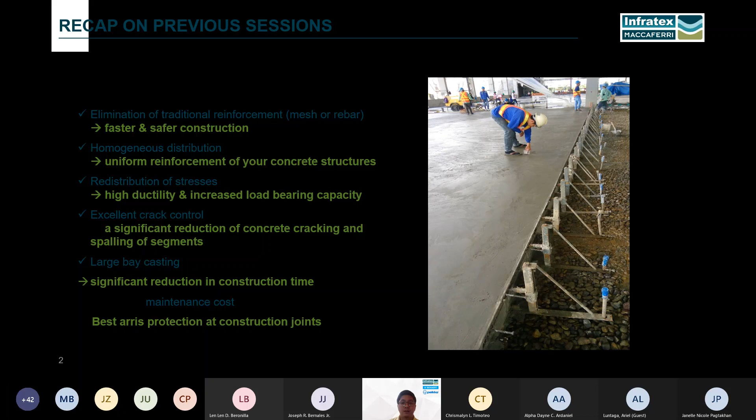For this session, we'll be discussing the construction methodology of jointless steel fiber reinforced concrete floor. This presentation includes the preparation of the soil, Terajoint and Teradowel installation, the dosing of steel fibers in the concrete mix, pouring of steel fiber reinforced concrete, other concreting processes, and at the end we'll have a question and answer session.

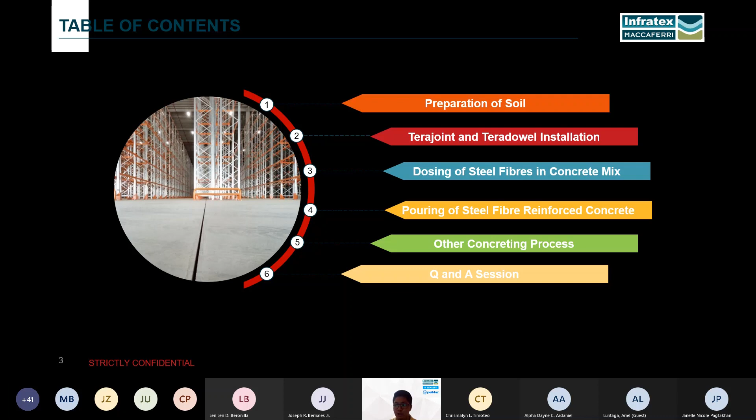To begin, just like any other type of construction methodology, it starts with the preparation of the soil. The sub-base must be prepared in accordance with the project specification. The soil must be well compacted.

Remember that if you do a backfill sub-base done in layers, each layer must be compacted as required on the spec. For example, we have here a 3-layer sub-base, so layer 1, layer 2, and layer 3 must be compacted as required. If the spec requires 95% compaction, each layer must be 95% compacted, not just the top or bottom layer, but all of the layers.

Next, make sure the soil is as flat as possible, with a flatness tolerance of plus or minus 10 millimeters. As mentioned in the first session, most constructors in the Philippines follow a stricter flatness tolerance of plus or minus 5 millimeters, which is actually better. But for consistency in this presentation, I'll use plus or minus 10 millimeters, since that's the range in which the Terajoint can perform.

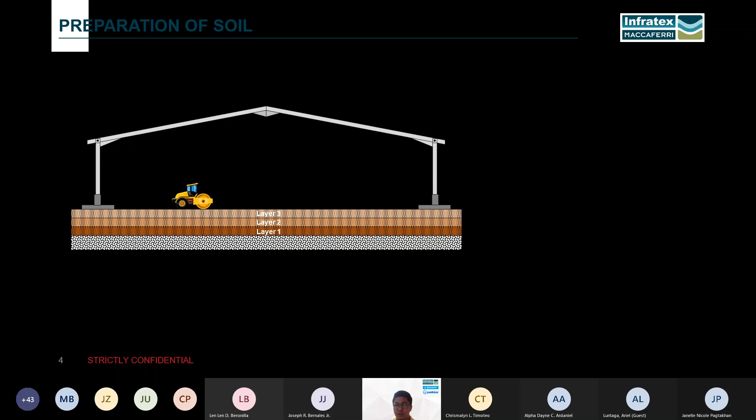The last point is to make sure the sub-base is dry with no water ponds. We don't want too much moisture penetrating the slab, causing oxidation or corrosion, and spalling of segments in the floor.

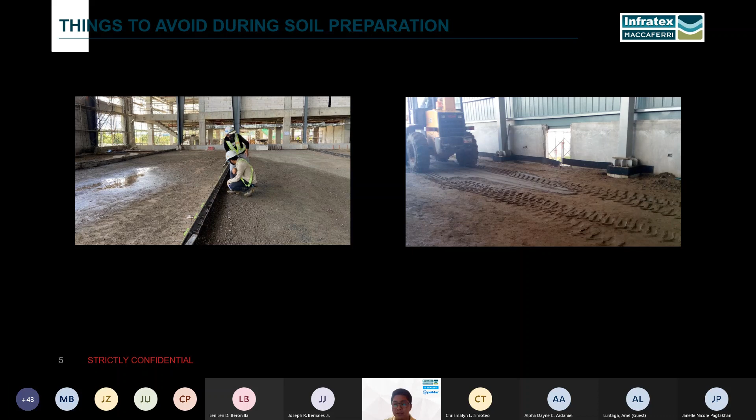Here's a sample of things to avoid during soil preparation. Number 1, water ponds or wet sub-base. Number 2, rutting or soil depression from heavy equipment present at site. Soil depression usually indicates soft spots or weak spots in the soil, and these soft spots are the usual failure points in your concrete floor, eventually causing deep cracking. As soon as you notice soft spots or depression in the soil, make sure to recompact it as required by the specs.

On the other hand, here's a sample of a perfectly prepared sub-base. The soil is dry, with no water ponds. Even though mixing trucks entered this area, it does not create soil depression, indicating the soil is well compacted. Open areas are also temporarily closed to protect the soil and freshly concreted slab against rain. It's also good practice to use a plastic film sheet as an extra layer of moisture protection, which also lessens friction between the soil and the slab as it starts shrinking.

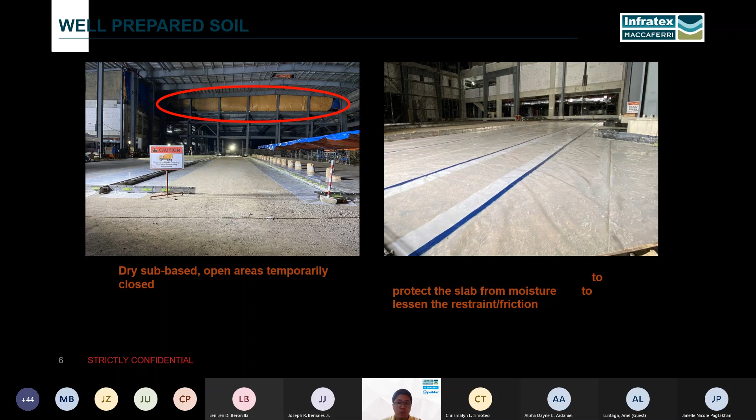After preparing the soil, the next step is Terajoint and Teradowel installation. Here I have two joint layouts. The left one uses a combination of Terajoints and Teradowels as a cheaper option. The green lines represent Terajoints, and the blue lines represent Teradowels.

Mostly, Teradowels are placed on joints underneath racking systems or joints where most traffic comes from foot traffic only, not forklifts. The right layout uses a full Terajoint system, which is more flexible in cases where the location of the racks isn't yet identified. These layouts are submitted to the clients for approval, and once approved, the position of each Terajoint and Teradowel line must be followed as closely as possible.

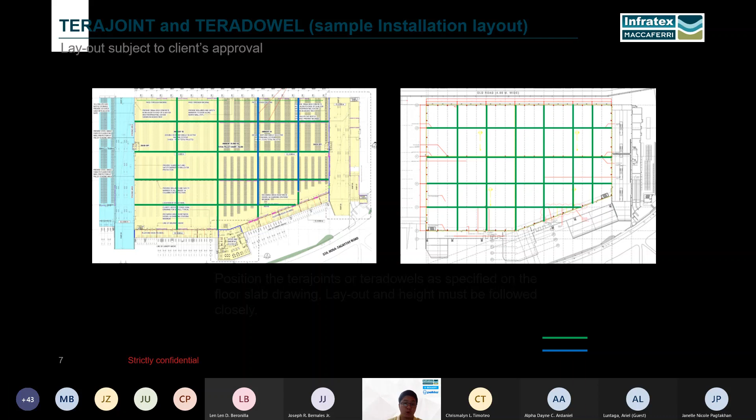As mentioned in the previous session, Terajoints are normally 15 millimeters smaller compared to the slab thickness. So if the slab thickness is 200 millimeters, the Terajoint height would be 185 millimeters. The reason is that we should maintain a 15 millimeter gap, plus or minus 10 millimeters, between the soil and the Terajoint. This gap allows the slab to move smoothly during its natural concrete shrinkage. The 10 millimeters is where the flatness tolerance comes from.

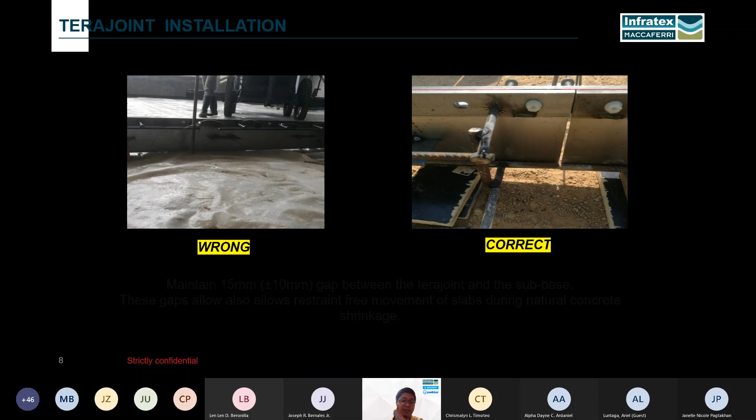If you install the Terajoint like this, where the soil touches the bottom of the Terajoint, it hinders or blocks the movement of the slab during shrinkage. This normally causes the arris to separate from the top strip. When they separate, the arris is prone to damage, and we don't want that to happen.

Since there is a gap between the Terajoint and the soil, there's a risk of overflowing concrete. So it is a must to remove that overflowed concrete while it is still wet, or otherwise we have to chisel off hardened concrete, which is time consuming. In our previous projects, to minimize that, we recommend using materials like pipes, timber from the pallets of the Terajoints, or even sand to block that gap. After the concrete hardens, you can just easily remove that material.

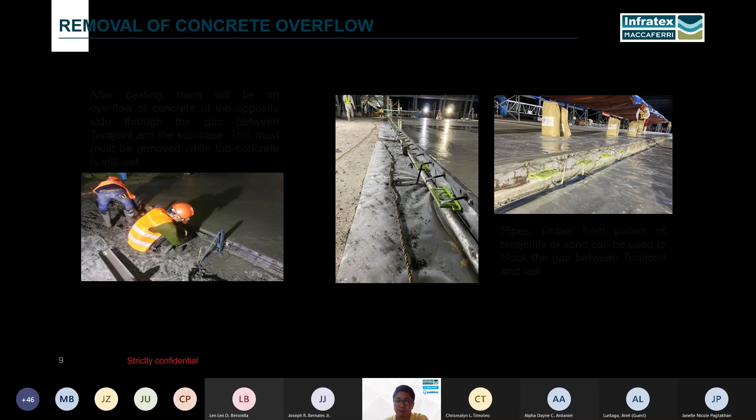In installation of the Terajoint, there's a device called Terafix to allow easy and quicker installation. It has several features. At the top, it has a bolt that adjusts the height of the Terajoint. At the middle, it has support tips and a pin that holds the Terajoint. At the bottom, it has a tapered foot to provide stability and allow easy removal from hardened concrete. At the other end, it has a hole that allows insertion of rebar or a rebar pin, and a bolt that locks the Terafix and Terajoint in place.

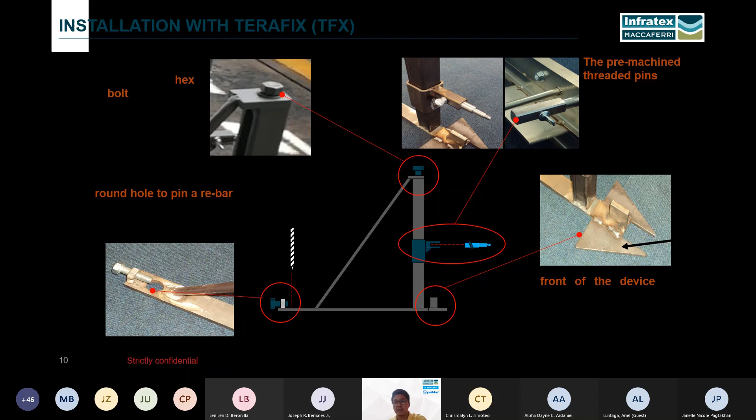Normally, we recommend using 3 pieces of Terafix per Terajoint, one at each end and one at the middle. However, if you're doing a very large bay, say 30 by 30, it will require a lot of Terafix — approximately 120 pieces for that bay size. That could be a lot and expensive.

So to minimize the number of Terafix, we adopt another method of using rebar pins. Instead of 3, we use 2 pieces of Terafix, one at each end, to adjust the Terajoint to the right height and straightness, then support it in between with rebar pins. When using pins, make sure not to weld or fix them directly on the top strip, the dowels, the sleeve, or the divider plate. We can only allow fixing or welding of pins on the studs, and it should be in between the dowels, not facing them, because it may block the movement of the slab.

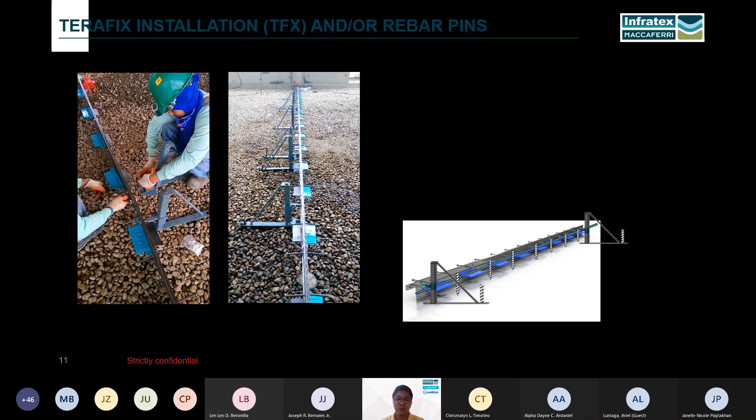In Teradowel installation, first prepare the timber or formwork according to the slab height. For example, for a 200 millimeter slab, use 40 millimeter timber or a bit smaller, but not less than 20 millimeters. The formwork should not be bent, so that you can install the sleeve flat on it. Then make a horizontal line at a height equal to half of the slab thickness — in this case, 100 millimeters. Also mark the center to center spacing between the sleeves, ideally 500 millimeters apart.

Before you install the sleeve, make sure to inspect each one. Any damaged sleeve should not be used. The tape on the other side, or the slot of the dowel, should be properly sealed off. Any damaged tape should be replaced.

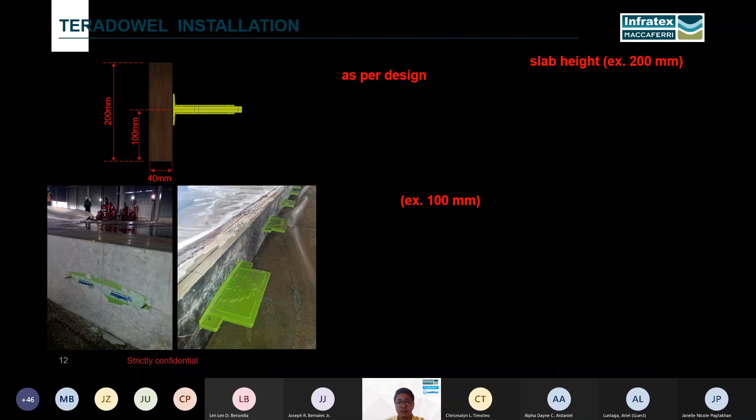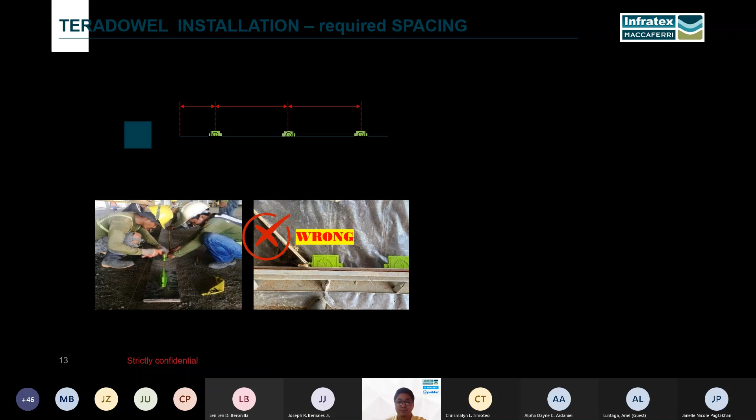Also take note that the first sleeve should be 250 millimeters from your starting point, such as from the walls or the isolation joint of the columns. Please avoid installing the sleeve where it touches the isolation joints or the walls. Same case on the end of the Teradowel line: if the sleeve ends up very near the end, say 100 millimeters or less, you can adjust the center to center distance between the last two sleeves to make the distance between the last sleeve and the end of the line between 200 and 250 millimeters.

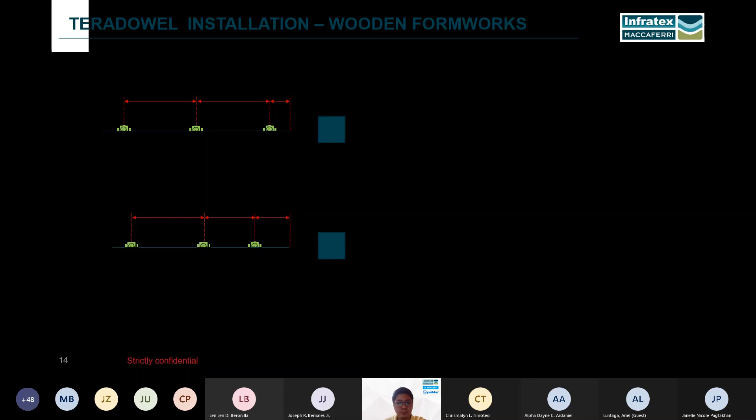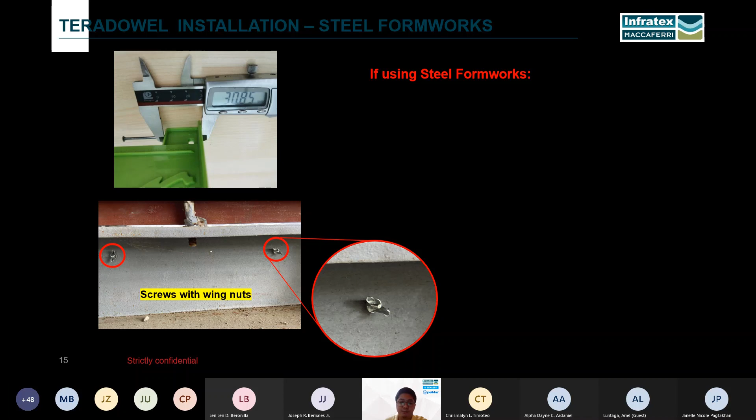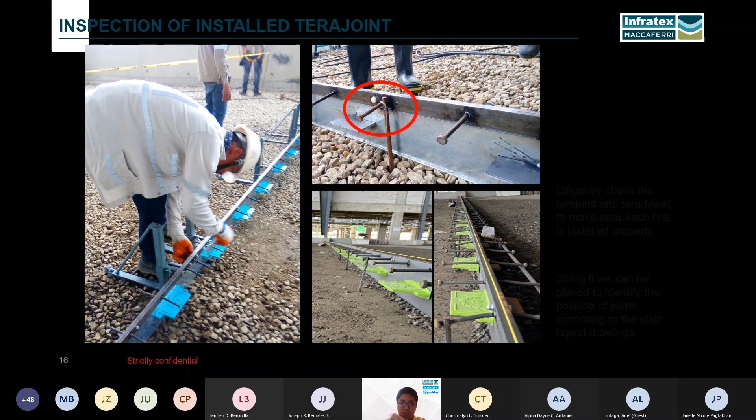After installing all the Terajoints and Teradowels, you have to double check or inspect each one, making sure you have the correct height and straightness. Any mis-installed pins must be adjusted — for example, where the pins touch the top strip, you have to adjust it at that portion.

After that, the next step would be the dosing of steel fibers. You can do the dosing either at the batching plant or at site at the mixing truck. But it's highly recommended to do the dosing at the batching plant through the conveyors and central mixers, because it will take less time to achieve the right amount of steel fibers per cubic meter of concrete.

However, if the batching plant is too far from the site, say the mixing truck will take more than 1 hour of travel time, it's best to do the dosing at site at the back of the mixing truck. In that case, the drum speed must be at the highest speed. After completely dosing the steel fibers, continue mixing for at least 5 minutes, or 1 minute per cubic meter of concrete. So if you have 10 cubic meters of concrete, continue mixing for 10 minutes.

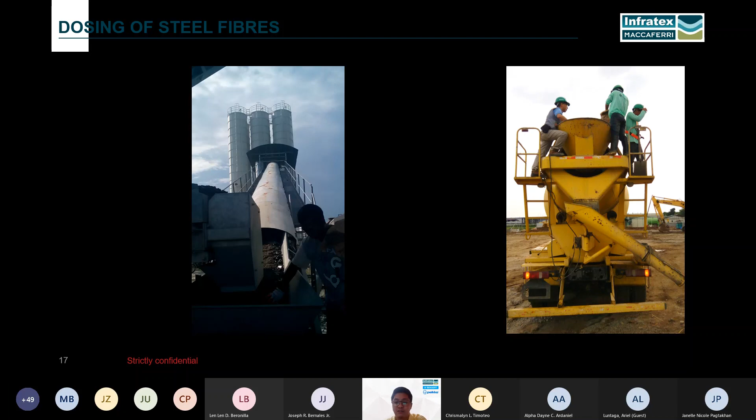After the dosing, you have to check the slump, which depends on the fiber dosage and how you're going to pour the concrete. For steel fiber reinforced concrete with 20 to 25 kilogram per cubic meter, if doing direct discharge, the slump must be 130 millimeters; if using a concrete pump, it should be 150 millimeters. For SFRC with fiber dosage of 30 to 35, by direct pouring you must have a slump of 130 to 150 millimeters, while using a concrete pump it should be 150 to 180. For fiber dosage of 40 to 45 kilogram per cubic meter, both for direct discharge and using concrete pump, the slump must be between 150 to 180 millimeters.

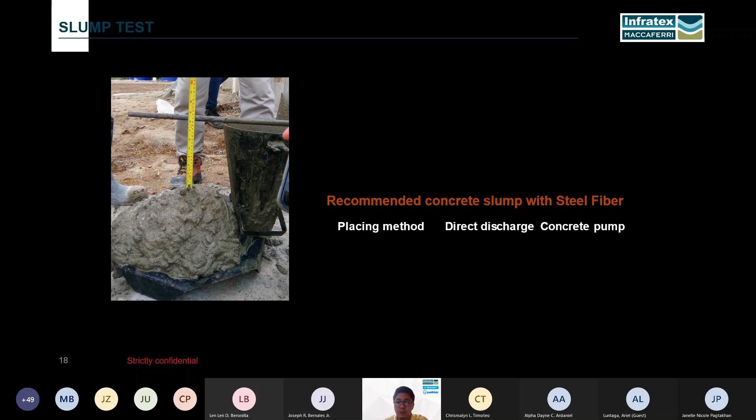After checking the slump, we'll do a washout test to determine whether we have the right amount of fiber per cubic meter. This is based on British standard EN 14721. We take 3 samples into a 5-liter bucket, then separate the fibers from the concrete mix by vibration, washing out the mixture, then picking out the steel fibers and washing it again. The collected fibers are weighed, and the allowable result must be within plus or minus 10% to allow it for pouring.

For this specific washout test, the fiber dosage is 20 kilogram per cubic meter, so for a 5-liter bucket, the theoretical amount of fiber is 100 grams. After doing the washout test, we recorded a result of 98 grams, telling that the fibers are well mixed within the concrete.

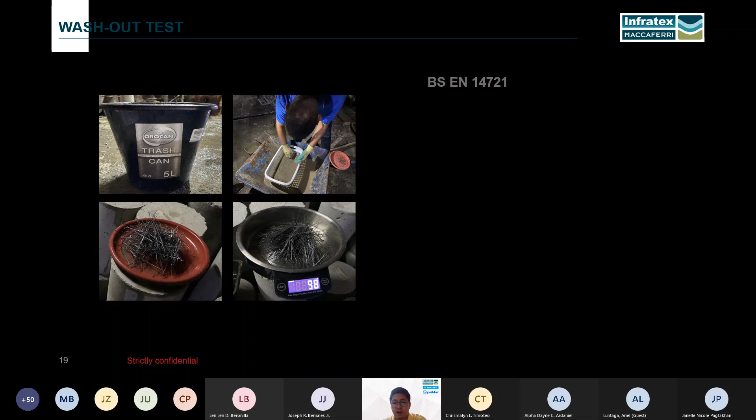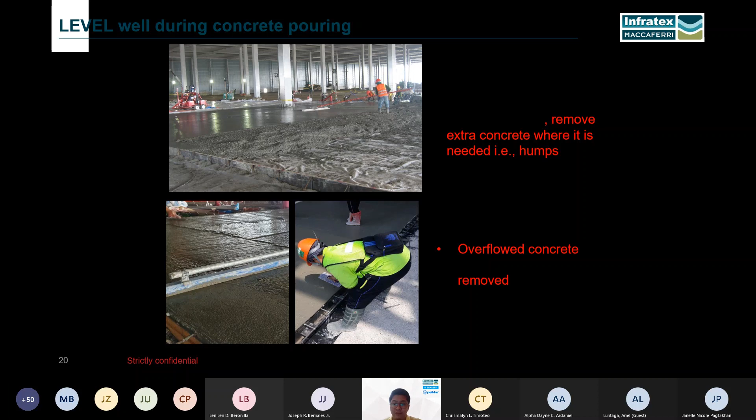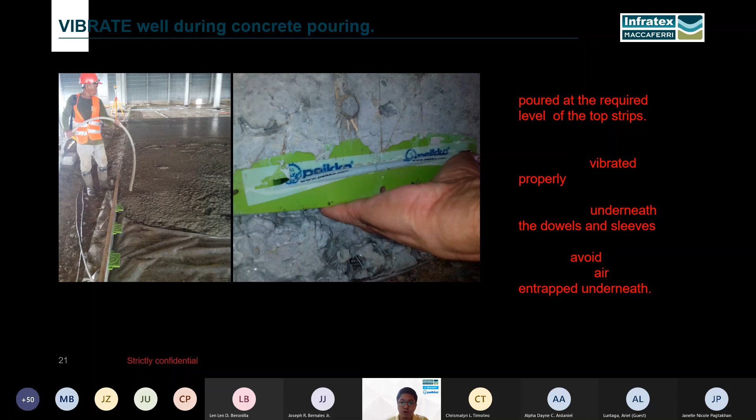After that, you're okay to pour and level the steel fiber reinforced concrete. Using trowels and other flooring equipment, distribute the SFRC within the bay. Overflowed concrete on top of the strip must be removed and properly leveled. Make sure also to vibrate the areas near the dowels and the sleeve, ensuring the areas underneath the sleeve or dowel are completely filled with concrete, so there are no hollow points or entrapped air.

Make sure to also inspect the areas around the joints, making sure it is level with the top strip. This is very important because once the warehouse or distribution center starts operation, unleveled floor on joints are very dangerous for the forklifts.

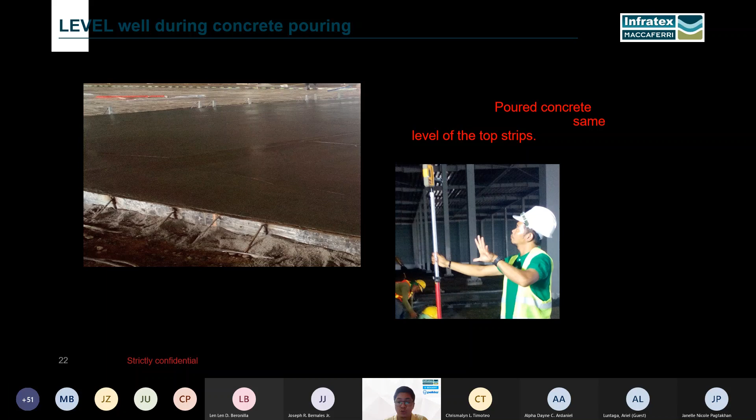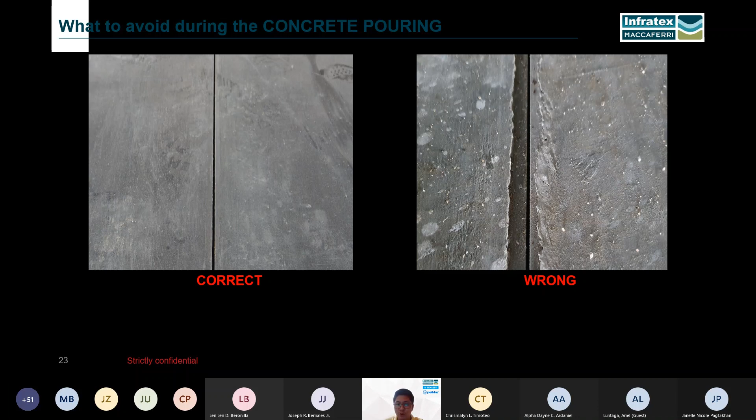This would be an example of a nicely prepared or leveled concrete on the Terajoints top strip. In this case, where the concrete overflowed on the top strip, it normally causes excessive dusting and unlevelness on the joints, which is a more common cause of safety issues and forklift accidents. So make sure to avoid overflowing of your concrete on the top strip level.

After that would be the screeding. For doing large bay casting or jointless floor, it's very advantageous to use a laser screed, because it uses a telescopic boom and automatically levels the concrete surface, fast yet precisely leveling it at a rate of 240 square meters in just 60 seconds.

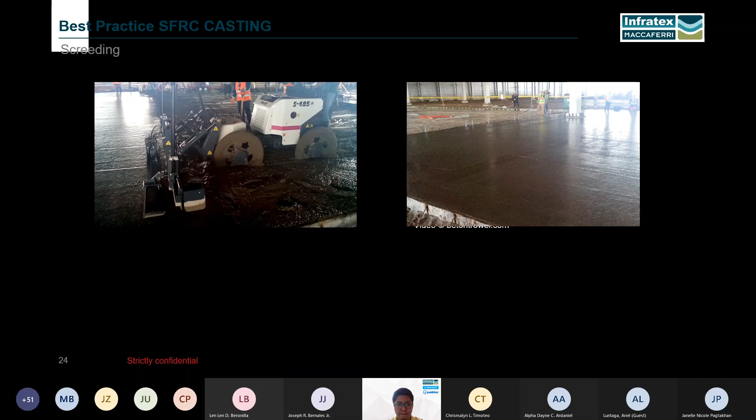After screeding, the next step is to make sure there are no floating or sticking out steel fibers on the surface of the concrete. The best way to do that is by using a mesh roller to depress or push down the fibers, including the aggregates. Then follow that by bull floating the surface to remove other imperfections, which also helps prepare the concrete for trowelling.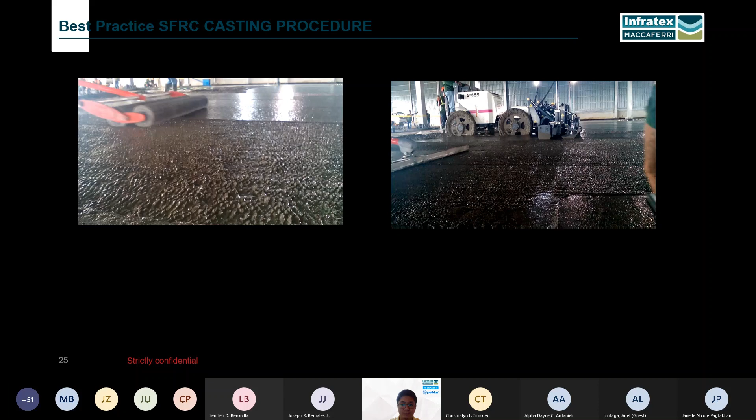I have here a video that shows the full process. This is also a large bay casting that uses steel fibers and Peikko armor joints.

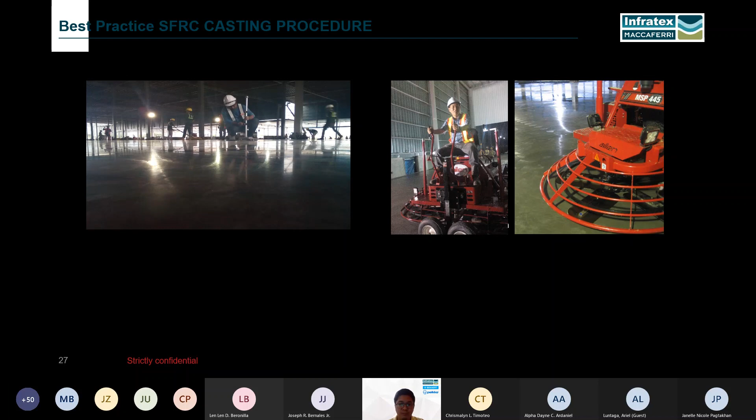Then after the concrete hardens and you're ready to pour on the other side, just remove the tape of the sleeve and insert the plate dowels. But before pouring, make sure that all the edges are clean and free from any rough surfaces.

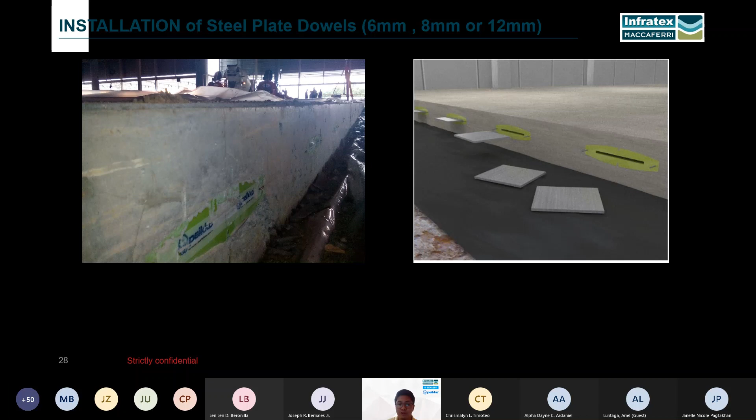Now that would be the whole process of SFRC floor construction. Now going on the maintenance, we know that the joints are the weakest spot on the floor, so normally cracks started on the joints and it requires regular maintenance.

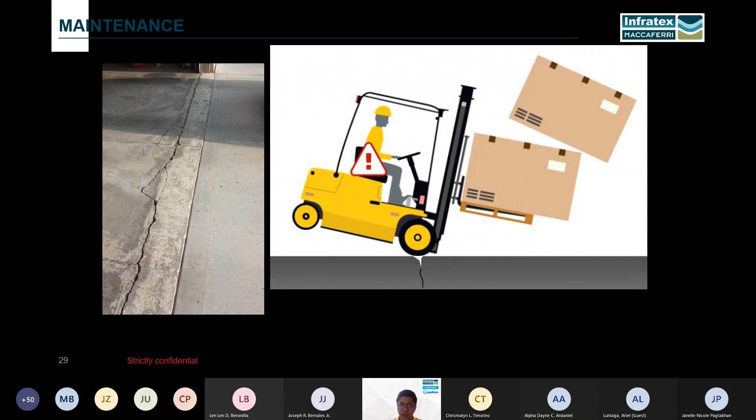So for joints without arris armoring, the joints normally chip off and create cracking and cause accidents on the forklift or other safety issues. So in using SFRC and armor joints or Terra joint, these cases are minimized, so the arrises are protected.

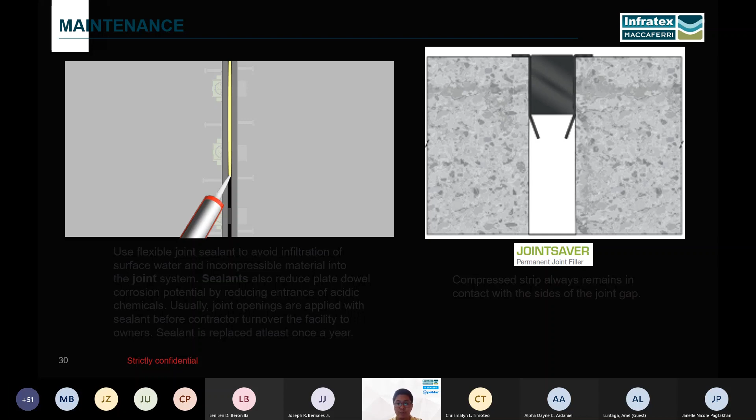So the usual maintenance to do is the once a year application of flexible joint sealant. The sealants will avoid infiltration of water and other materials, and also it reduces the corrosion on the plate dowels. Also, to further minimize your maintenance, Peikko offers another product, JOINTSAVER, which is a permanent joint filler, a compressed strip that remains in contact with the joint gap.

This would be the sample of the finished floor, taken from our ongoing Southern Star project, this would be the warehouse area. So after the 28-day curing period and the concrete reaches its required compressive strength, the area is okay to use as staging areas for other materials.

Lifting equipment can also utilize the floor. Just make sure to use necessary protective materials like plywoods or steel plates. Also,

we have this area on the loading bay or the loading bay area. So what we recommend on Southern Star is to have this portion a combi slab, meaning it is a combination of rebars and steel fibers.

So why is that? Because a loading bay area is considered a busy area or a high risk area, so formation of cracks on this portion is greater than any part of the warehouse or the distribution centers. So in order to minimize that, to address that, we recommend to do the combi slab.

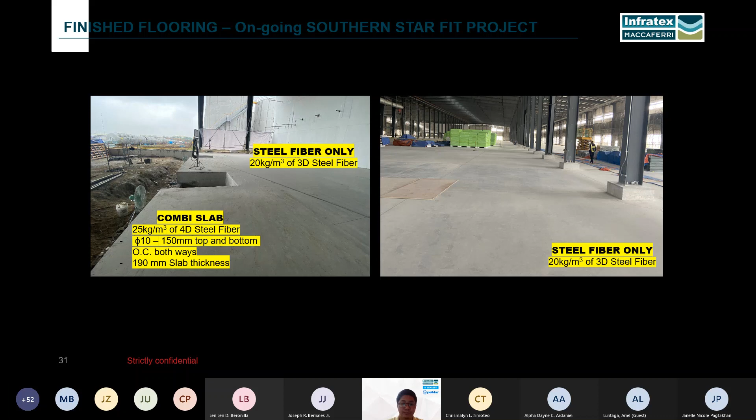So the combi slab eliminates the construction joints or the saw cuts, which also minimizes the maintenance of the floor eventually. So this would be a more clear photo for that design.

So this one uses a combi slab and it is separated by a Terra joint. So once, if there is a chance that a crack forms here, it would not pass through this area. So this would be a pure steel fiber concrete.

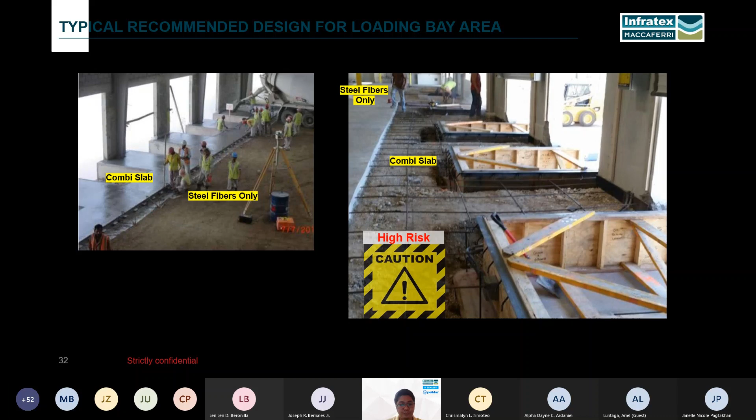Another area from Southern Star is the cold storage area. This also uses a combi slab because the challenge in cold storage is that when it started operation, it's very hard to repair, it's very hard to maintain.

So in order to achieve a low maintenance floor, we recommended a combi slab so that the steel fiber will achieve an optimal resistance to thermal cracking, and also we lessen the joints. So joints are normally the main cost of maintenance, so the frequency would be lessened.

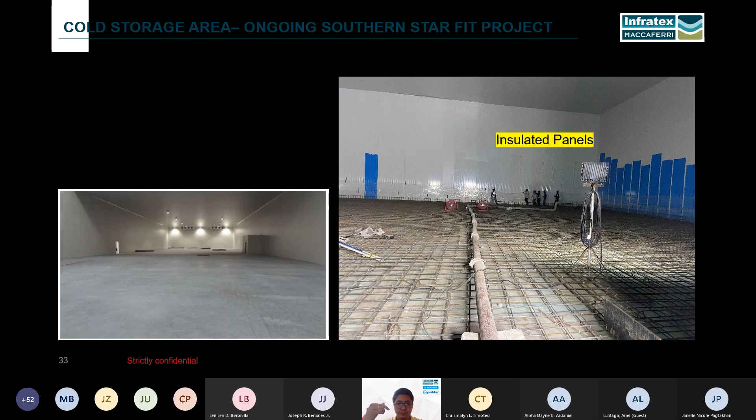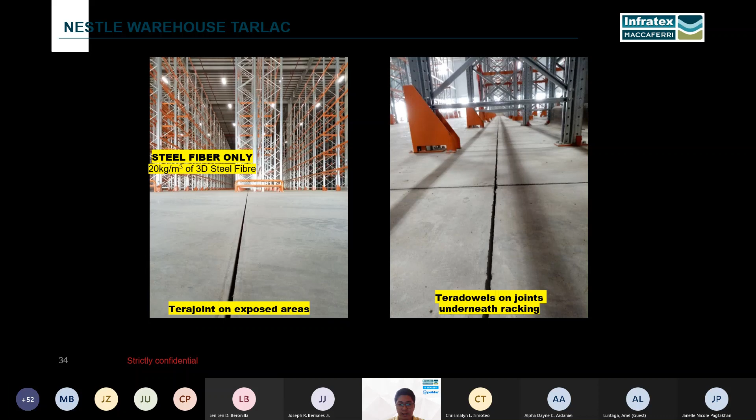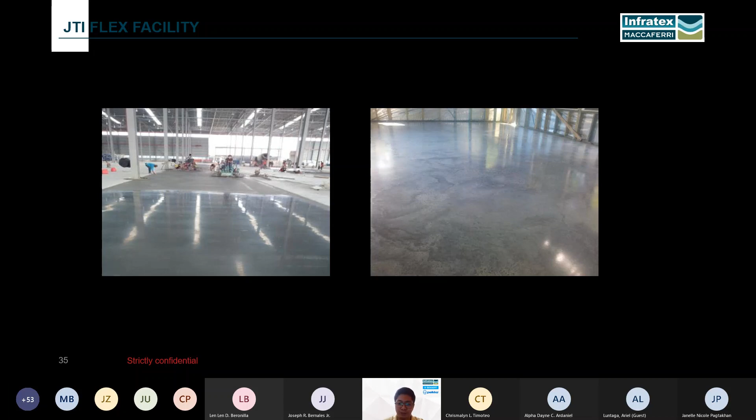That's actually ends my presentation. So if you have questions, we can answer you now.